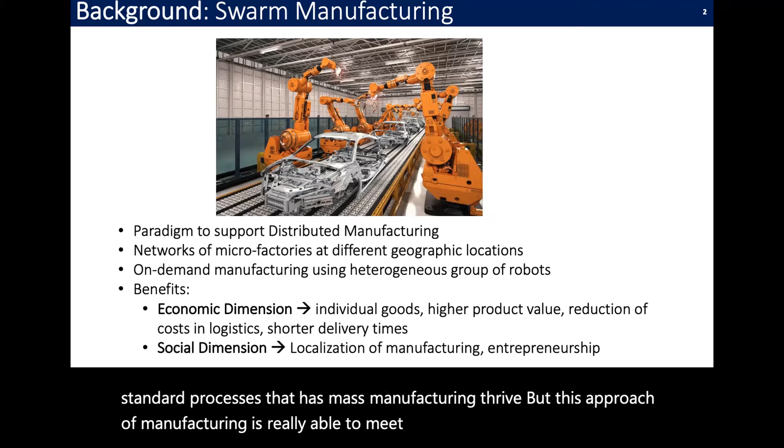That is where this concept of swarm manufacturing comes into consideration. It's basically the novel paradigm for distributed manufacturing where networks of micro factories are established at different geographic locations to enable on-demand manufacturing. It does so by enabling a group of heterogeneous robots that work together to manufacture a variety of different products at each of these micro factories.

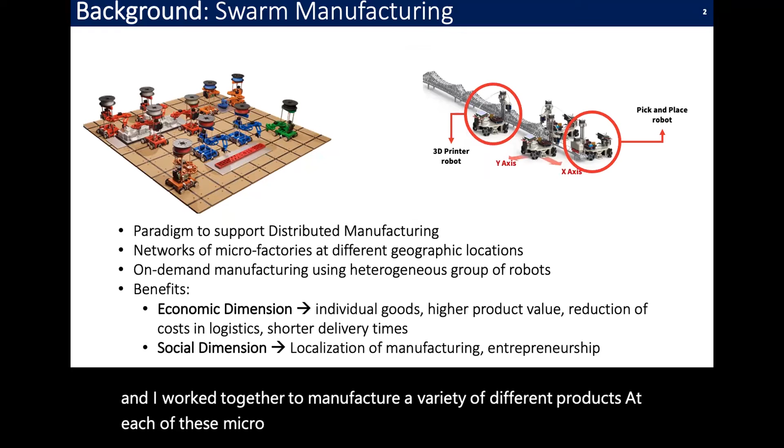And as it can be seen, it has several benefits, both in terms of economic as well as societal aspects. In terms of the economic dimension, we can see the current state of supply chain has been really disrupted by a lot of different factors. And if we had individual microfactories at certain geographic locations, any kind of product people need can be manufactured locally, which significantly reduces these complicated supply chains that are very fragile at this point. On the other side, it also has a lot of societal benefits because it promotes use of local products for manufacturing, as well as promotes entrepreneurship and so on.

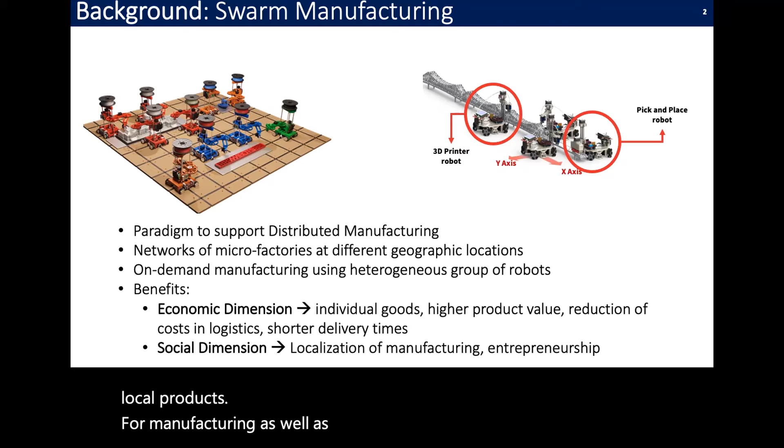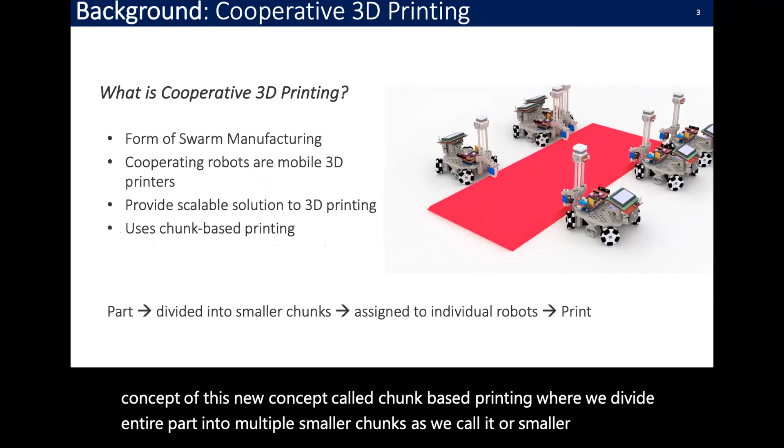So cooperative 3D printing is a primitive form of swarm manufacturing where all these cooperating robots are mobile in nature and do primarily 3D printing. Such cooperation is achieved by using a new concept called chunk-based printing, where we divide an entire part into multiple smaller chunks, or smaller pieces, if you will, using a chunking strategy so that the chunks can be assigned to individual robots, which can then work in parallel to print the assigned chunks.

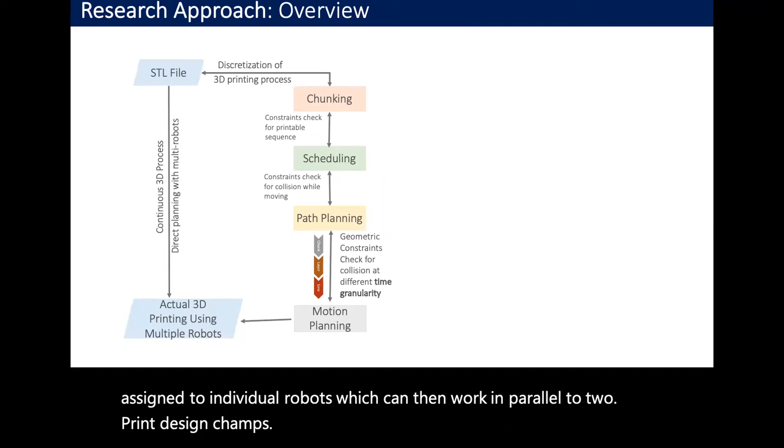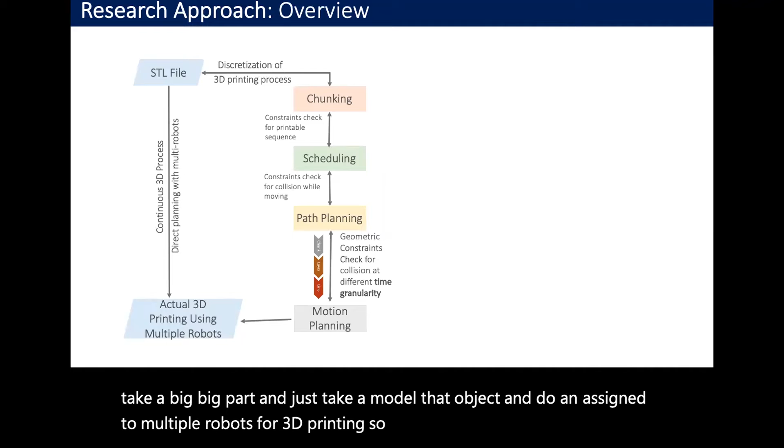Prior to this, there was no existing approach that allowed us to take a model of a big object and assign it to multiple robots for 3D printing. So we discretize this entire process of 3D printing using multiple robots into multiple stages. The first step is taking the part and discretizing it into smaller chunks, using some sort of chunking strategy to divide the part.

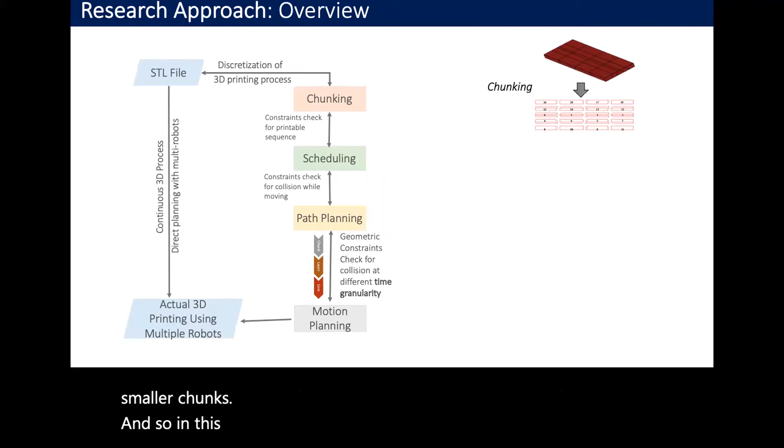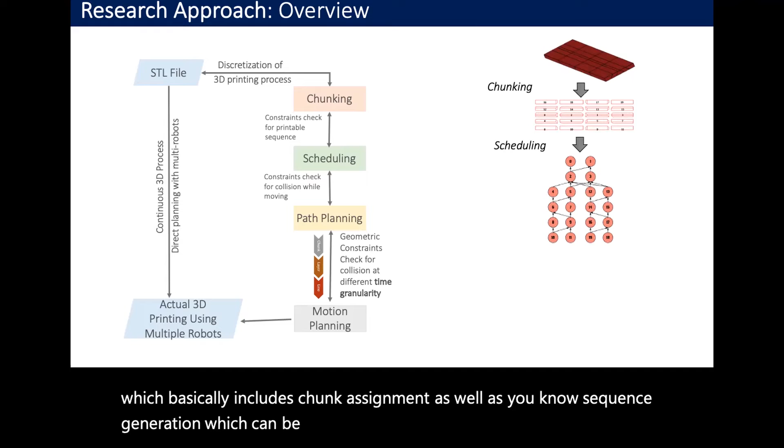Once the part is divided into smaller chunks, we then create a print schedule, which includes chunk assignment as well as sequence generation, which can be represented using a directed dependency tree, where each of the nodes represents a chunk, and the edge connecting two nodes represents the dependency relationship between chunks. And once the schedule is generated, we do path planning and motion planning and implement the print schedule to print the part.

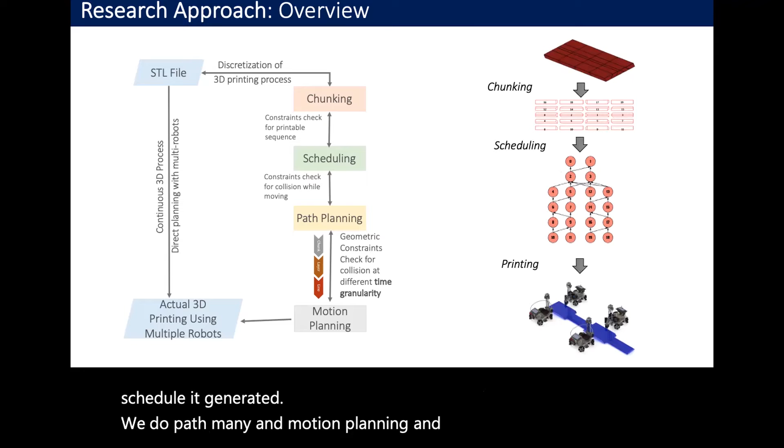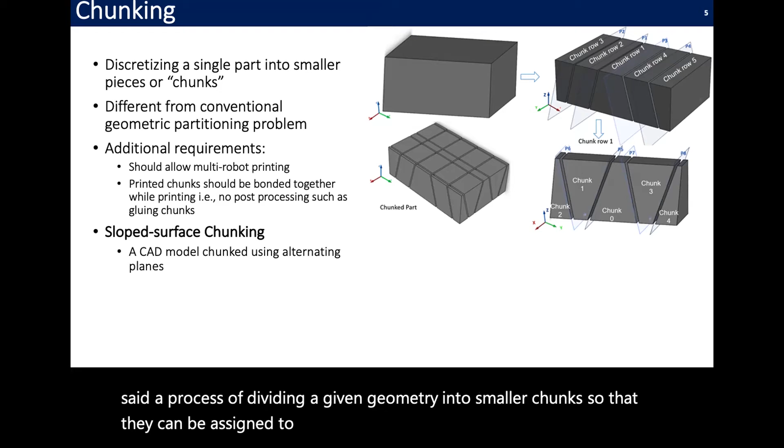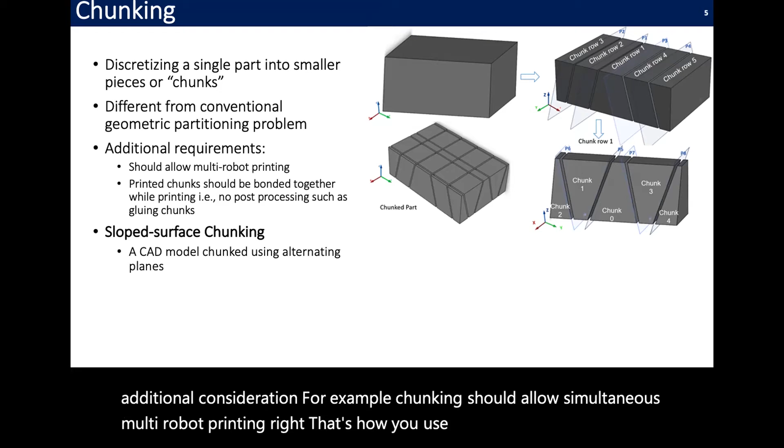So the first step of cooperative 3D printing is chunking, which is, like I said, a process of dividing a given geometry into smaller chunks so that they can be assigned to individual robots. However, it's somewhat different from the conventional geometric partitioning problem as it requires some additional considerations. For example, chunking should allow simultaneous multi-robot printing, right? That's how we reduce the time. And the bonding between the chunks should also be formed while the printing is taking place. We cannot wait until all the chunks are printed and then have somebody come and glue the part together.

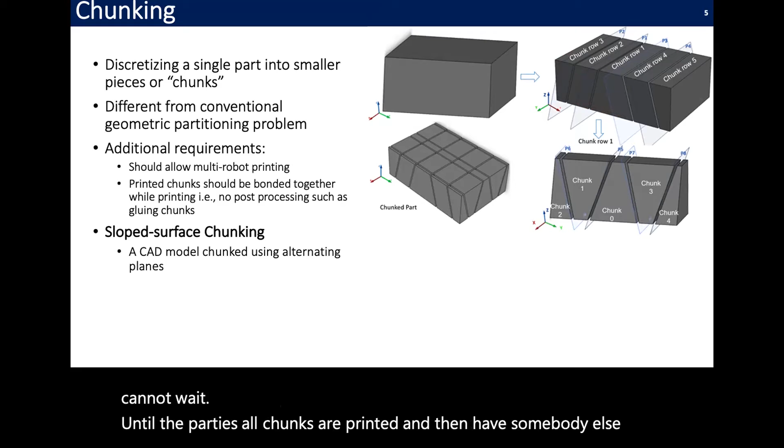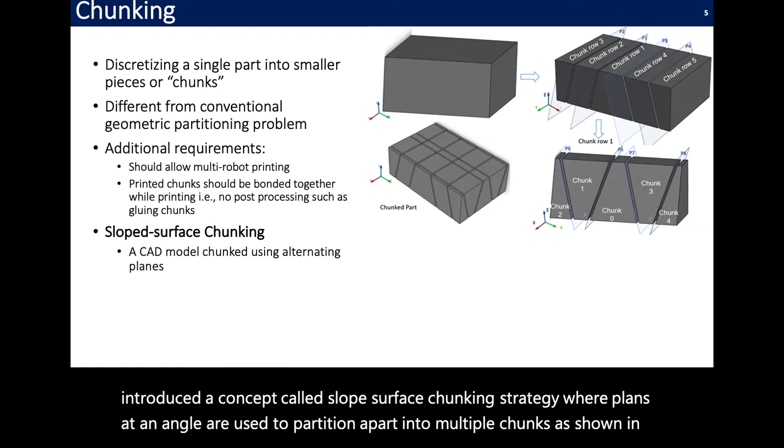So to achieve this objective, we introduced a concept called the sloped surface chunking strategy, where planes at an angle are used to partition a part into multiple chunks, as shown in the figure here. The chunking is done along one axis first, in this case the x-axis, and then along another axis, resulting in multiple chunks. In this case, there are 25 chunks in total.

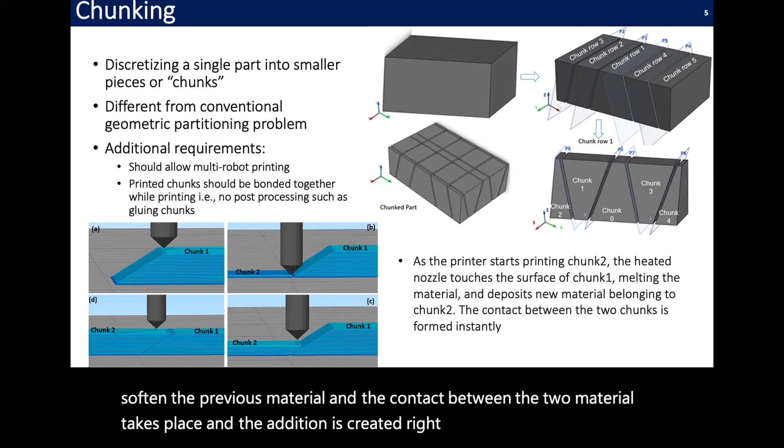The figure at the bottom shows how the adhesion between the chunks takes place as the heated nozzle comes in contact with an already printed chunk, right here, and deposits new material. The heated nozzle softens the previous material, contact between the two materials takes place, and the adhesion is created right there. We've studied some mechanical properties of these chunk-based parts. I'll be happy to refer you to any of the previous studies that we've done, but these are not highlighted in this presentation.

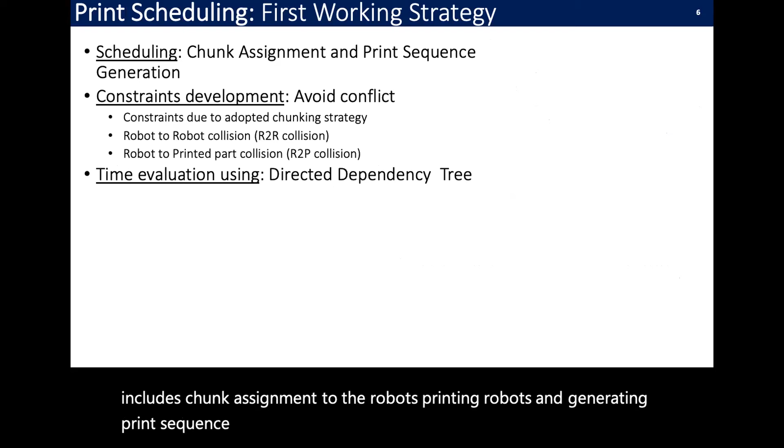So the second aspect of cooperative 3D printing is scheduling, which includes chunk assignment to the printing robots and generating a print sequence to undertake such printing. So if you look at this same rectangular board that I showed previously, once it's chunked, we can represent the print schedule using a directed dependency tree.

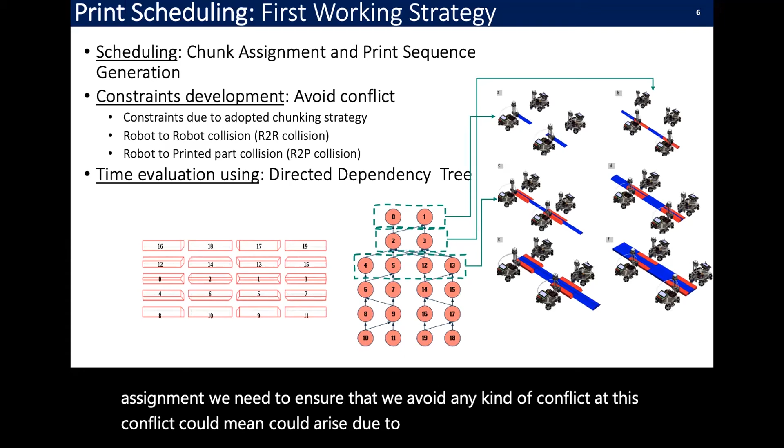In addition to this, while generating such a print sequence and assignment, we need to ensure that we avoid any kind of conflict. This conflict could arise due to the chunking strategy, or it could arise because robots are printing different parts, and we want to make sure that when they travel from one location to another, they do not collide with any other printed part. We also want to make sure that during any print cycle, they do not collide with one another either. These types of scenarios are to be avoided while generating a print schedule.

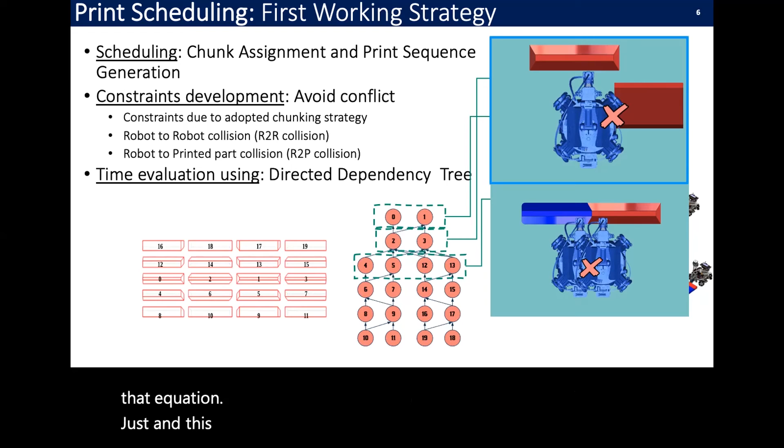And finally, another aspect of scheduling is, once you have a schedule, to find out how long it takes to print the entire part. So we utilize the directed dependency tree that we use to represent the print schedule. We formulated a mathematical formulation to evaluate the print schedule to see how long the total print takes. I've not put that equation in here because this is a short talk, but if anybody is interested, I'd be happy to send the reference material later on.

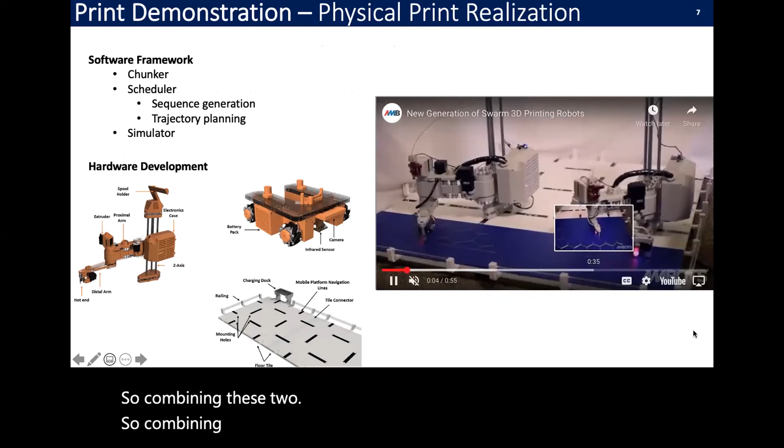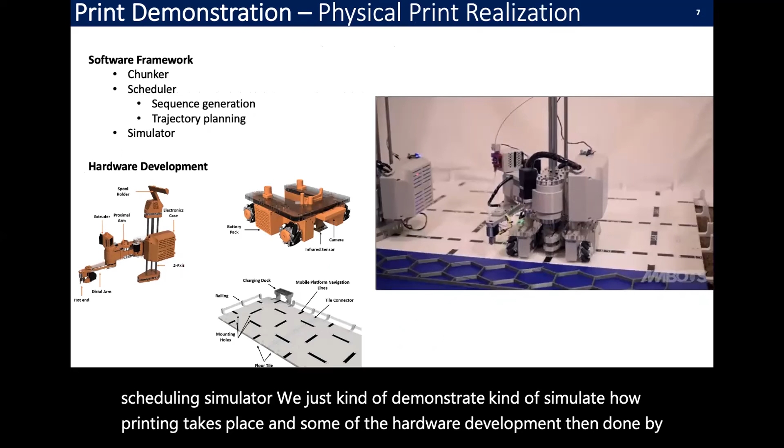So combining these software frameworks that I talked about previously, with the chunking, scheduling, and simulator to demonstrate how printing takes place, and some of the hardware development done by AMBOTS, a startup based in Fayetteville, Arkansas, we're able to demonstrate the actual printing of a really large object using these 2 printers. As you can see, these 2 robots are printing chunks that have been pre-assigned to them.

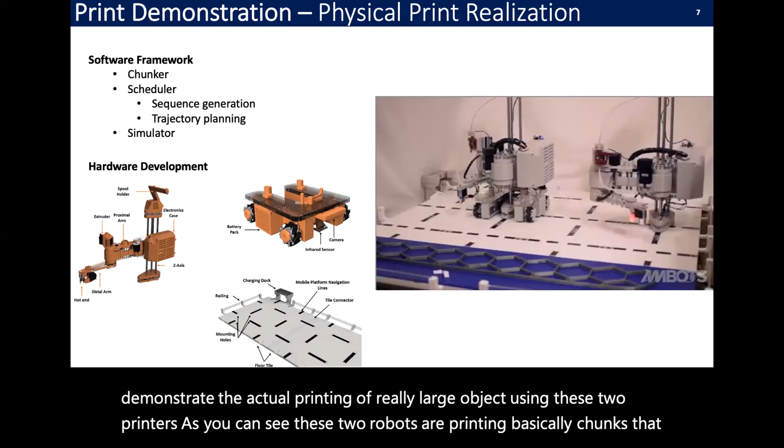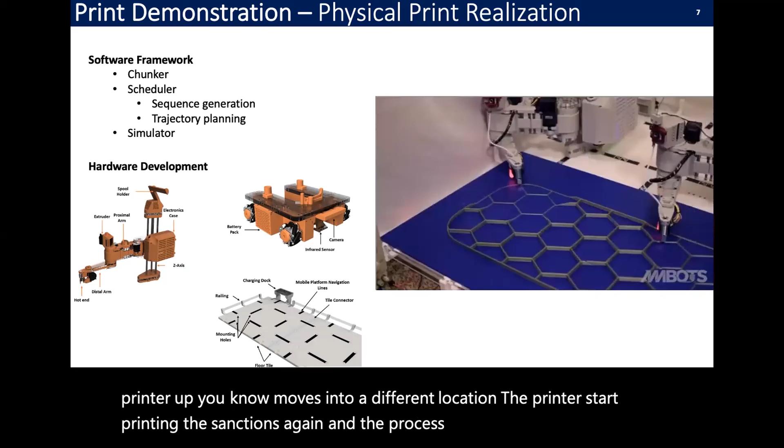And as they need to move from one print location to another, a mobile platform comes, picks the printer up, and moves it to a different location. The printer starts printing the assigned chunks again, and the process continues until the entire part is complete. In this case, the part printed was about 1,000 millimeters by 250 millimeters, so it's pretty large. So you can see how this concept of chunk-based cooperative 3D printing can be utilized to print something really large scale.

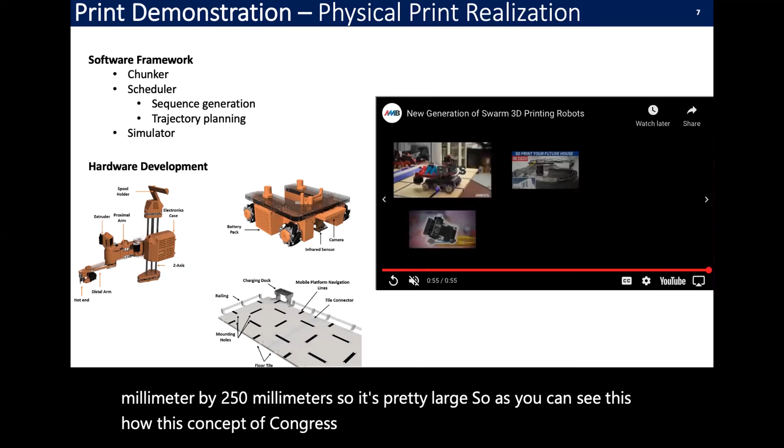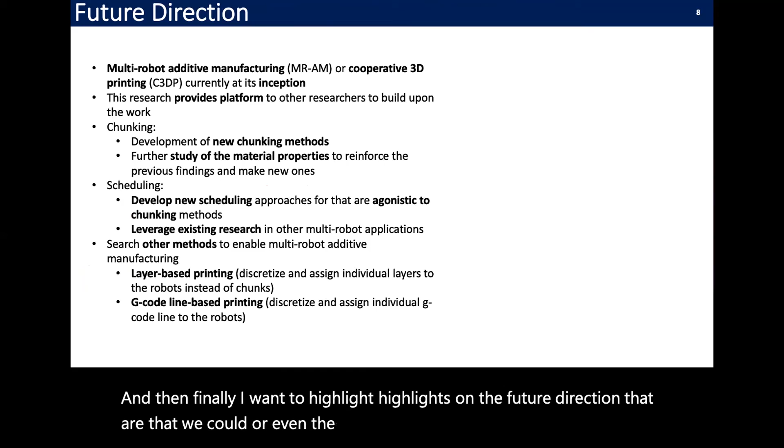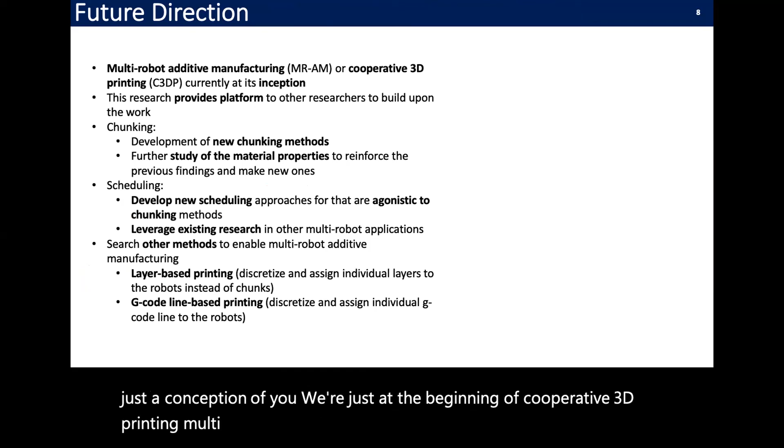And then finally, I want to highlight some of the future directions that we, or other researchers, could take to further the concept of cooperative 3D printing. We believe we're just at the beginning of cooperative 3D printing, multi-robot printing, whatever you want to call it. There is a lot of work to be done, and it will probably take a group effort of the whole community to further this research.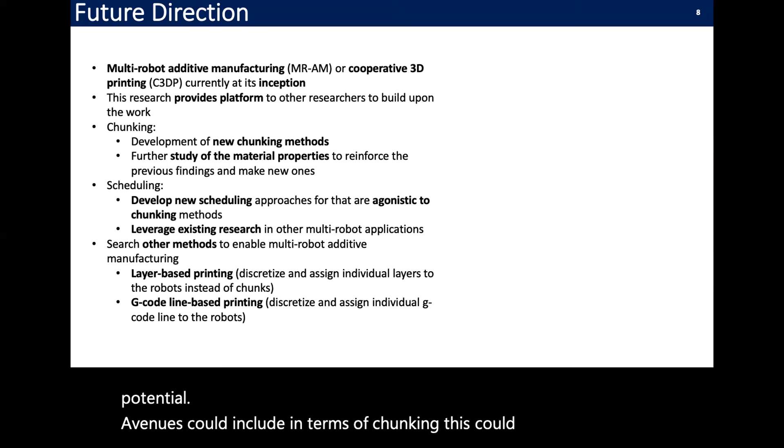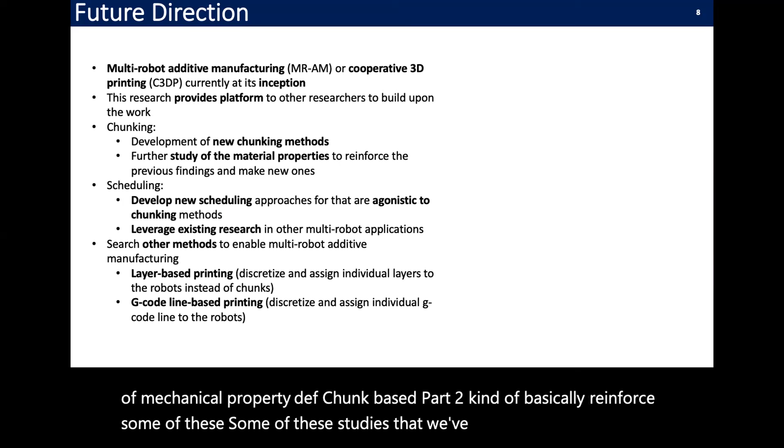Some of the potential avenues, in terms of chunking, could be developing new chunking methods, or doing further study of the material properties of chunk-based parts to reinforce some of the studies that we've done. In terms of scheduling, new developments could include generating print schedules that are more agnostic to the chunking strategy, and leveraging existing studies in the multi-robot field to come up with new printing strategies.

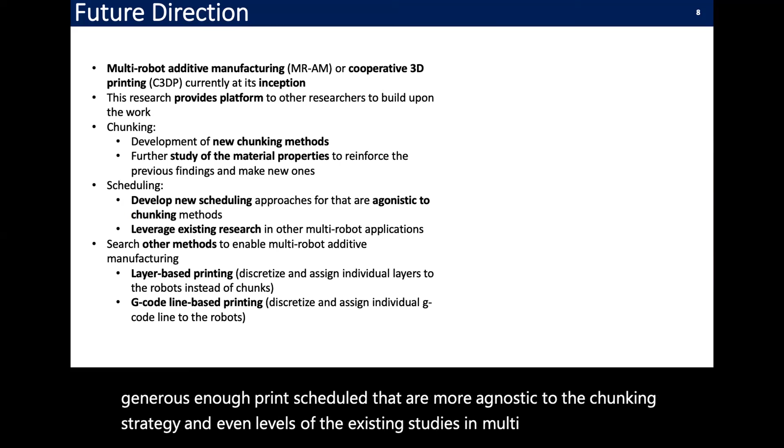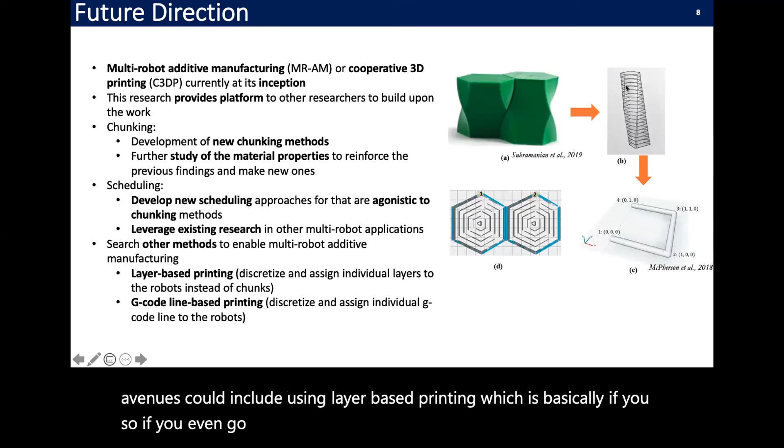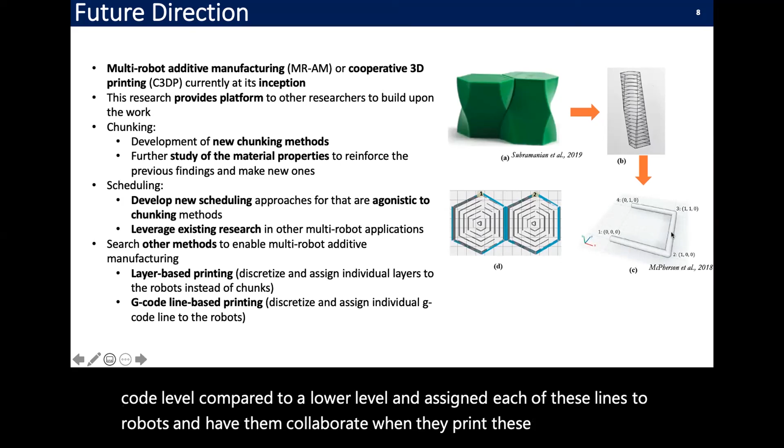Aside from chunking and scheduling, other research avenues could include layer-based printing, which is if you discretize the entire part further down into layers and assign individual layers to printing robots and have them collaborate while printing individual layers, that could provide more control to the user. We can even go further down to a G-code level and assign each line to robots and have them collaborate while they print individual G-code lines. This would provide more flexibility to the user, but it probably requires more rigorous research work in future.

With that being said, that is all I have. I'll be happy to take any questions.